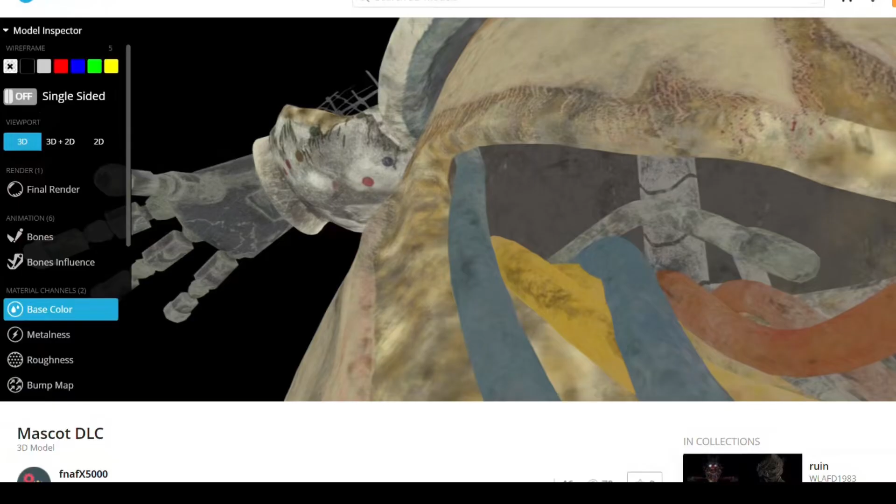You're going to find your model. I use this website, it's called Sketchfab, and it's really amazing for finding models. The model I've used for my suit is called Suit Springbonnie. It comes in multiple parts. So what you're gonna do is download it in the FBX format, and then you unzip the file.

If you need to make a human base that's custom to your features and your height, you can use MakeHuman. It's very easy to use. You can change a lot of parameters, but especially the height. Then you can go to Files, Export, and you can choose what format you want to export in. I go with STL because then I can import the same model into Fusion.

You're gonna go into Import and you're gonna find your human models. Alright, you rotate it, you make sure it's 90 degrees. You go to this tab right here and you verify the scaling is the way you want. Then you click on the model, you open that little transform window right here, and you verify it's the exact same size you want. Here it says it's 17 meters tall, so of course it's not. You're going to fix that. On each axis you're going to have to fix the height.

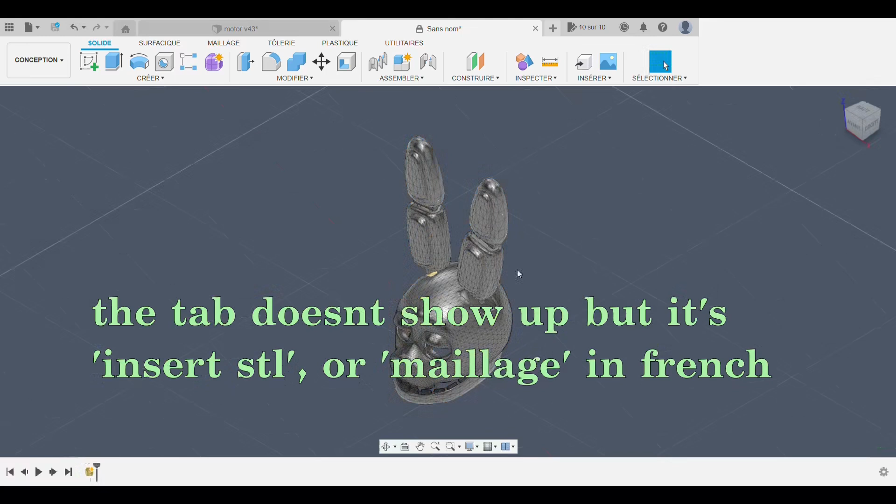So you need to hop on to Fusion 360, which is a free software, you open a new conception, you go to Insert, then you can select the STL file and hop, voila. Alright, seems good to me. So then, once that is done, you can go to Modify, and you select that. So basically, you're going to select each part individually, and then you're going to separate them from the main body.

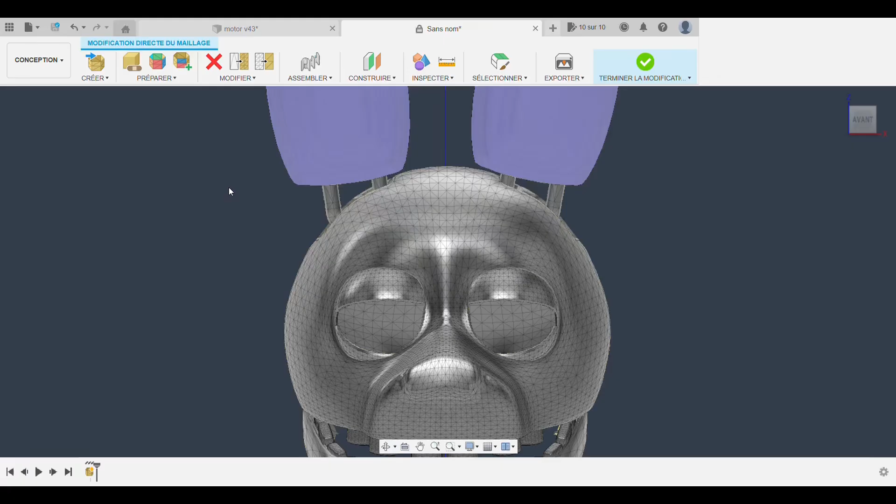This is a very easy process. You just have to double click on the different parts to select them entirely, you know. I'm also going to select the teeth for this one, then Modify and Separate. Hit enter. Do the exact same for all of them.

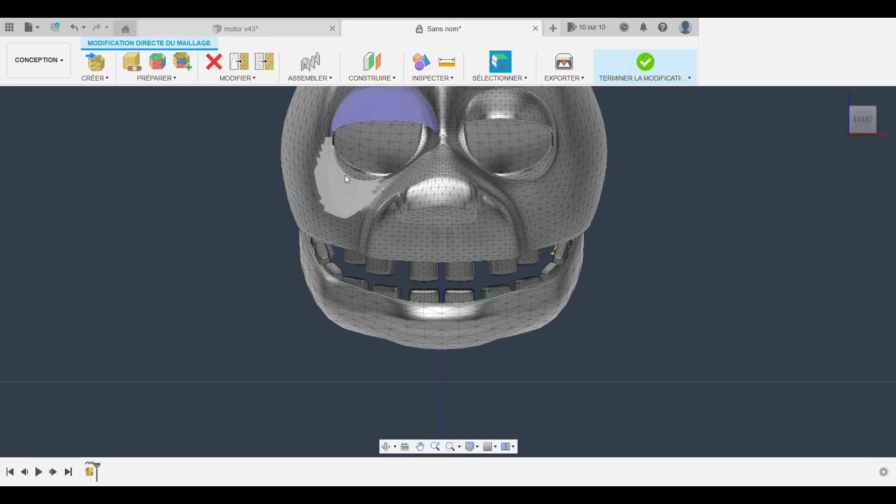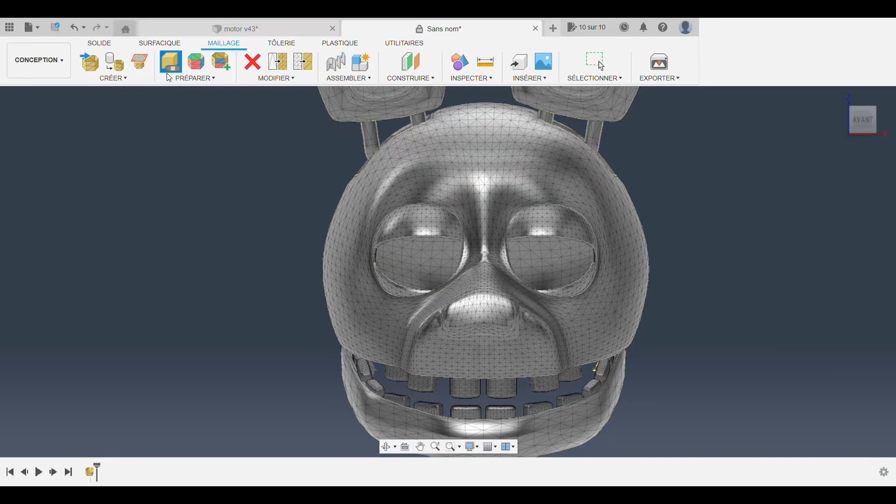So now you've got everything. You're going to turn this STL file into a mesh that you can modify one by one. But first off, I like to hit repair so that I can make sure everything is safe to be turned into a file that you can modify. Ooh, wait, right. So that's an issue you can encounter. I'm going to convert this. So you should have something like that.

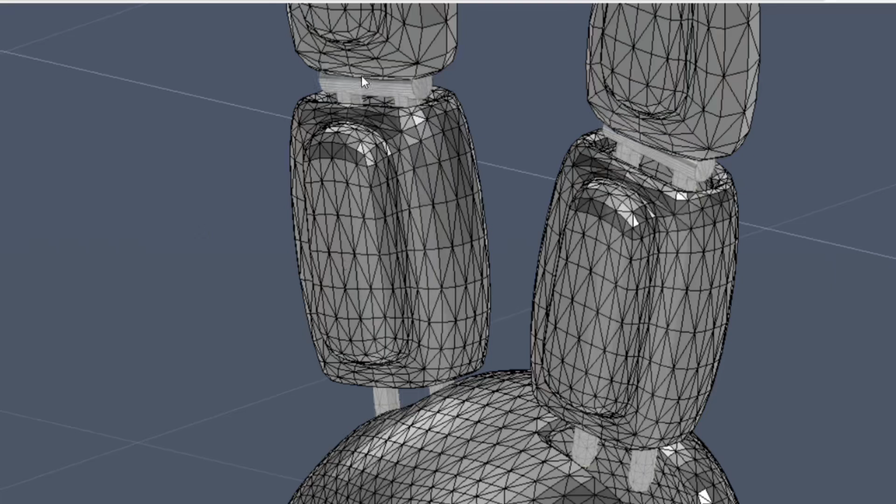So you've got your mask ready. Well, since I don't want these eyelids to move, what you can do is try to resize them so that you can try to wear them. But what I'm gonna do first is clean the mesh a little bit, since it's pretty rough on the edges.

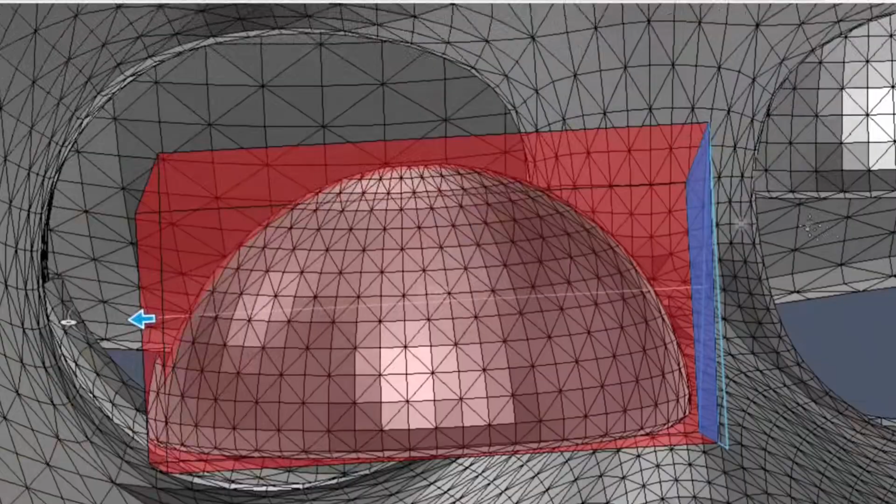Right, so what you're gonna do is hit L for line. You select the face. Basically, what you wanna do is draw a shape like that, right on what you want to remove on this eyelid. To clean it, you select the face, and then you extrude all the way here. You press cut. When you have this kind of double layer like this, it's when you don't repair your STL.

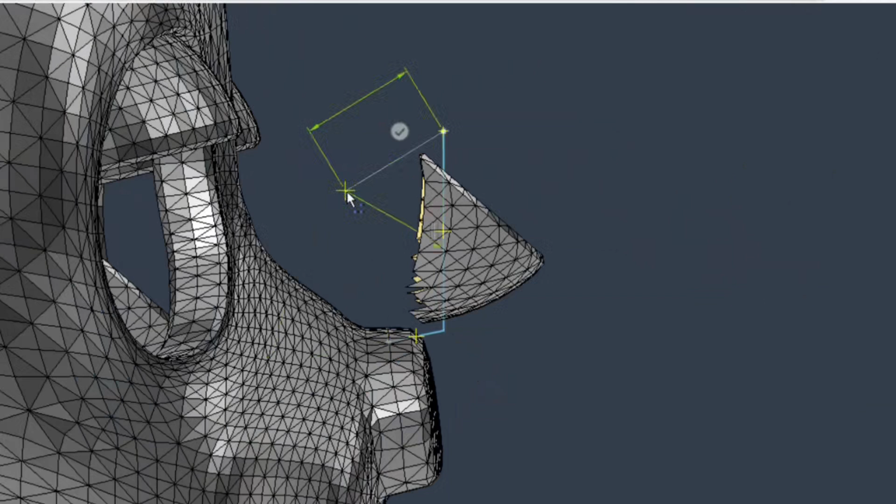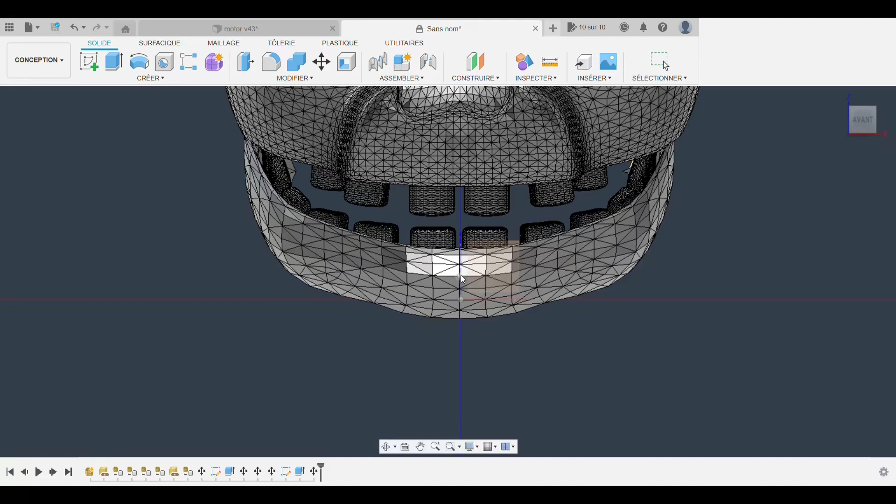So you don't need to do that for the other side. You can hide those two by pressing V. What you're gonna do first is go to this right here. You make a plane that goes through 3 different points. You select 3 points in the middle of the mask. You see, like that.

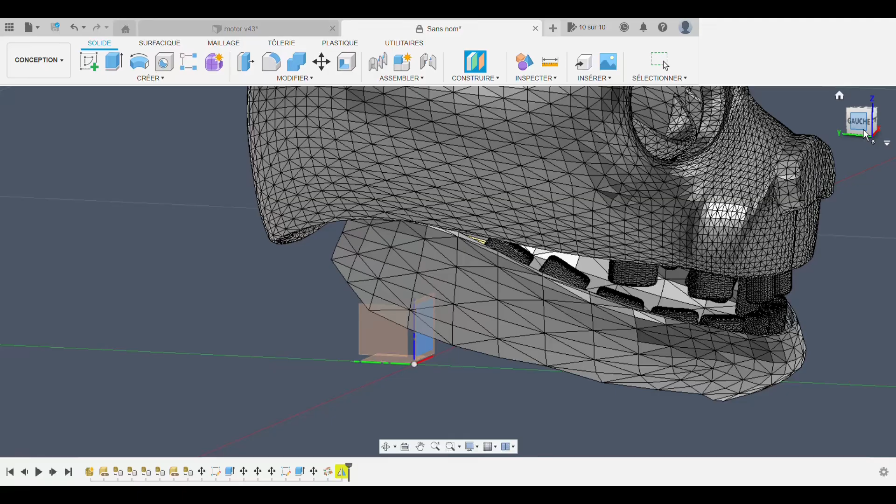And then you go to create, symmetry, you select the eyelid, and then under you select this. Alright, so you have that. You can hide this plane, we don't need it anymore. And you're going to use Fusion to slice the model.

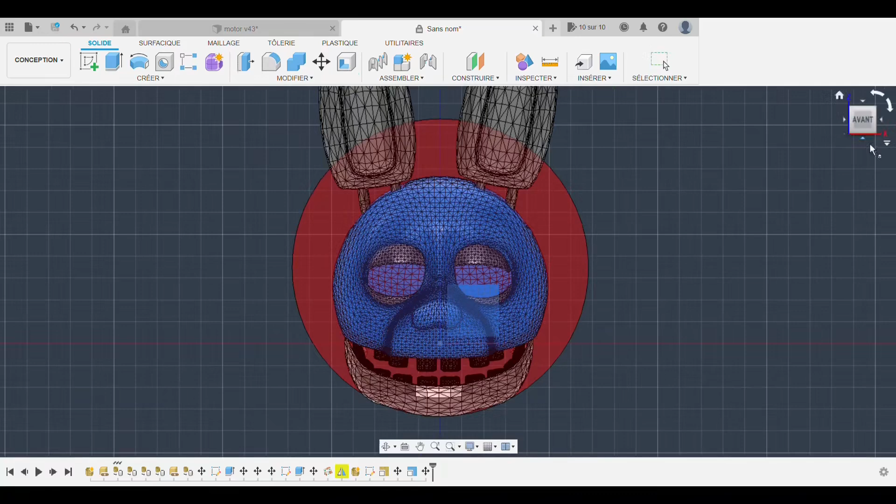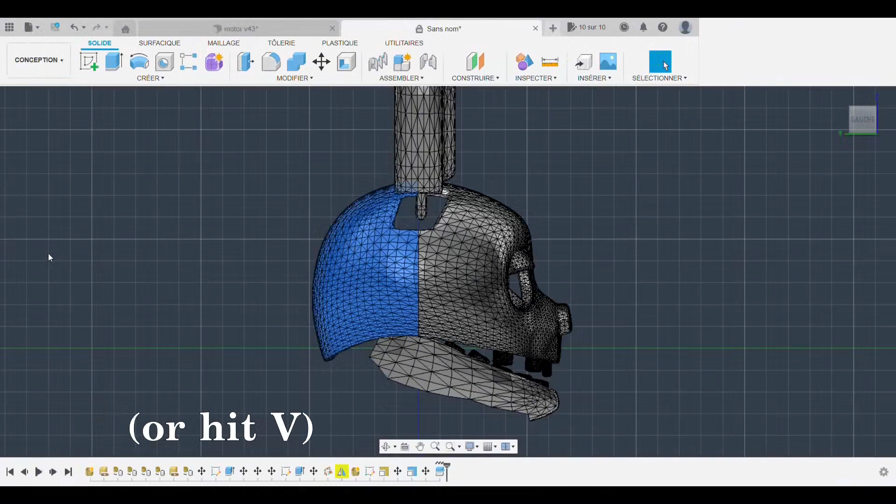You can go to modify, cut the body, and you can cut the head in 2 different parts. Depending on the size of your printer, you can cut the head in as many parts as you want. Back, etc. So I'm going to hide the face by clicking on the eye icon. Then I'm going to create a part like this. I'm going to press L.

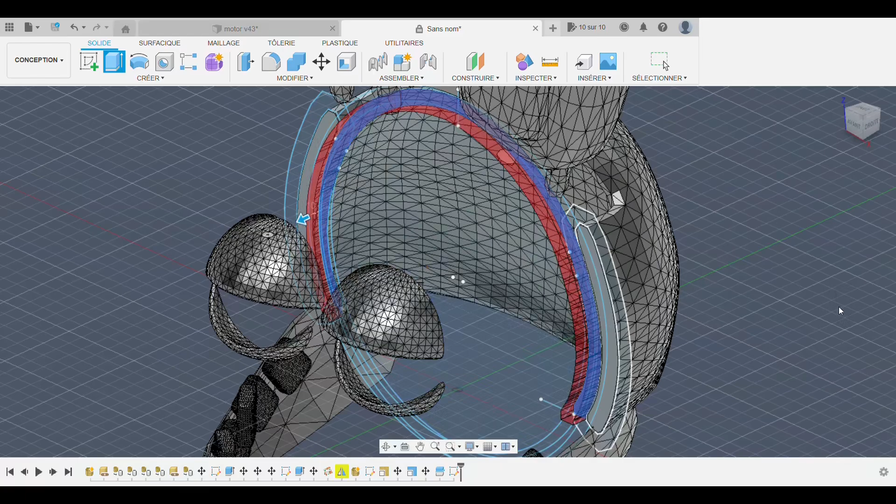And there you go, you've got some kind of arch. I'm gonna go for 2 sides, 10 as well, might as well do it. And there it is, you've got your support for the eyes. What you can do next is make some holes for the screw. What you also can do is just glue the face or solder it. It's really up to you.

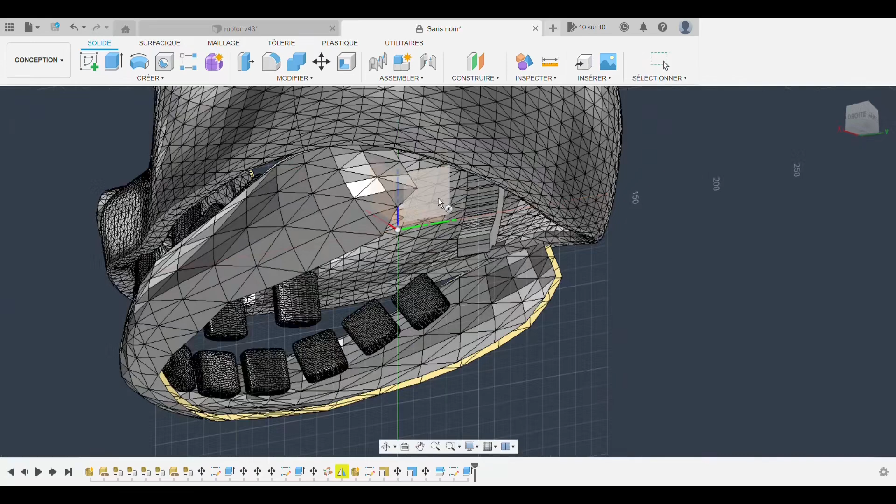I'm just going to add a few holes for the arch to work. So you just sketch some circles. I'm gonna go for 8mm. So now you have something to put your screws in, alright?

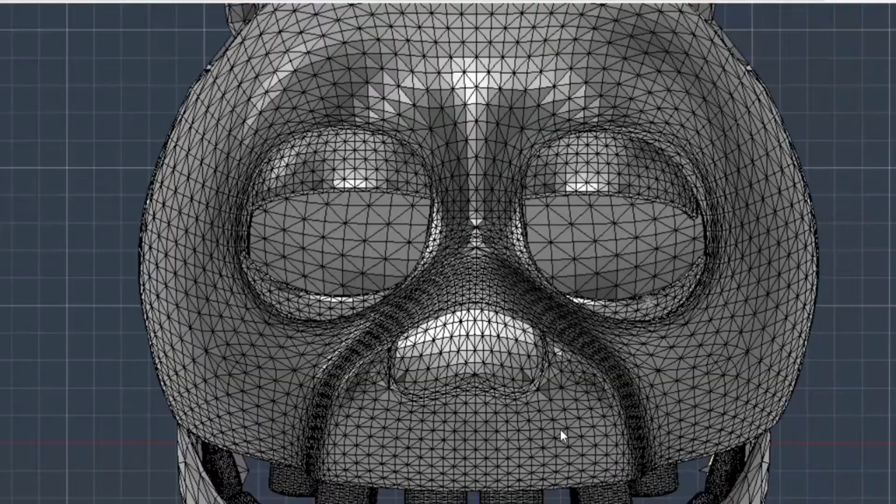And let's rearrange the endoskeleton so that we can put the ears. For this tutorial, the ears will be static. If you want the ears to have some articulations, I'm going to perhaps make a tutorial for that, but for now they are going to be entirely static.

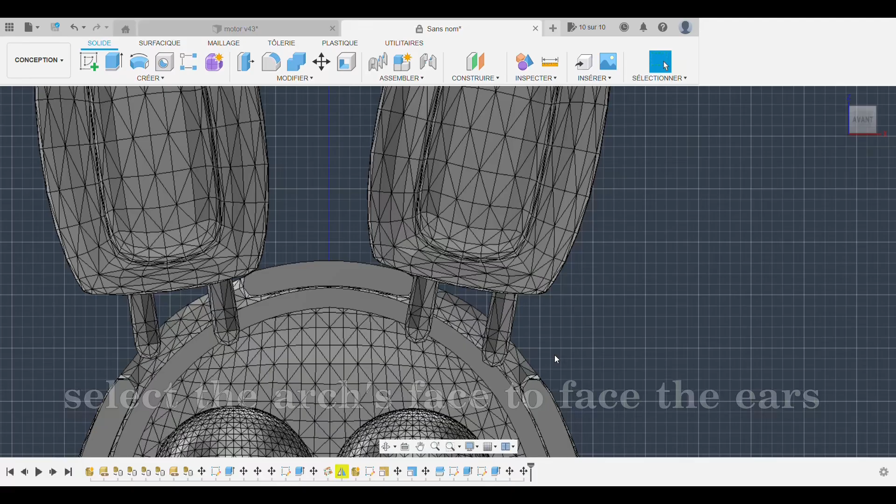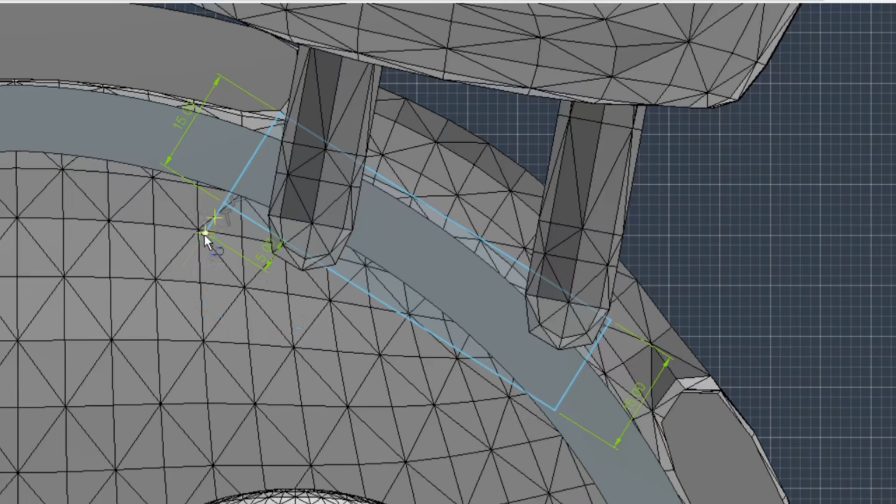Right, so I'm going to make a part that will kind of use these 2 rods to make a connection to the base part. Then you extrude, you hit new body, and then you can just put everything together. And then of course, oh wait, I forgot one of the different points here.

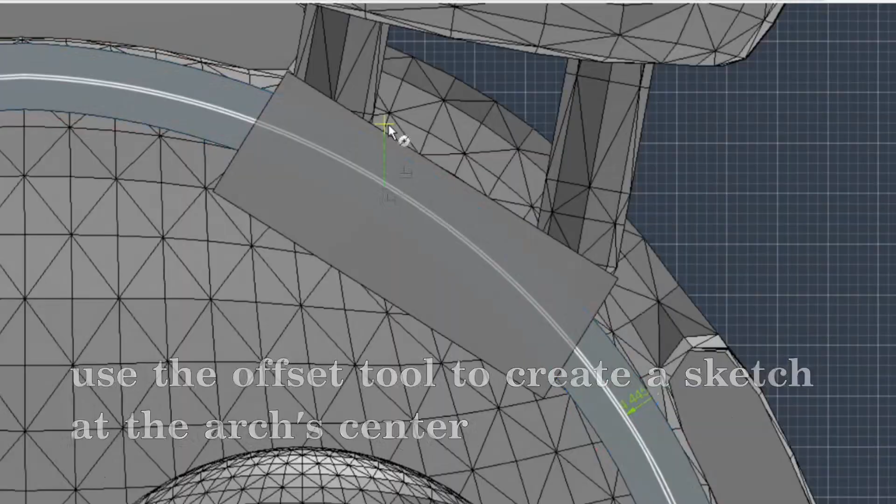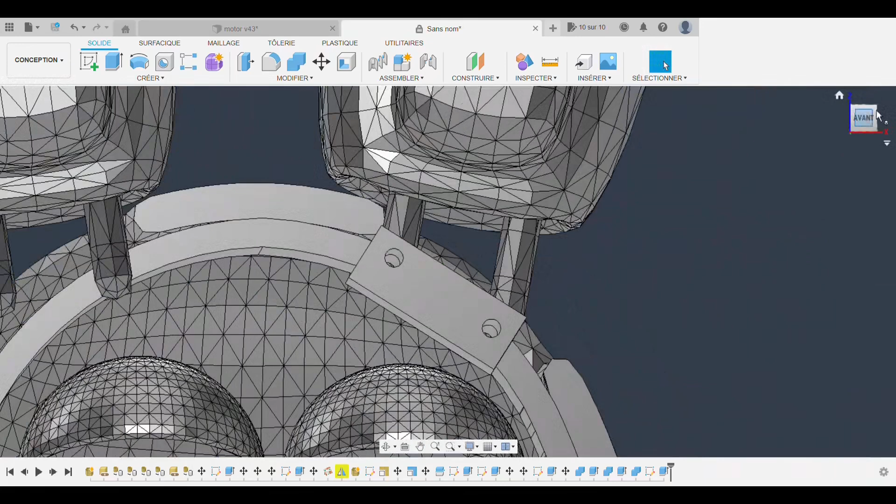Then you're going to hit C to create some holes for the screws to be in. So, using that middle part I can do 2 holes, 6mm each, and then I can extrude these holes. The ears like that will be static, of course. They won't be able to move, but that's for the better because it's a beginner tutorial and I don't want to overwhelm you, you know.

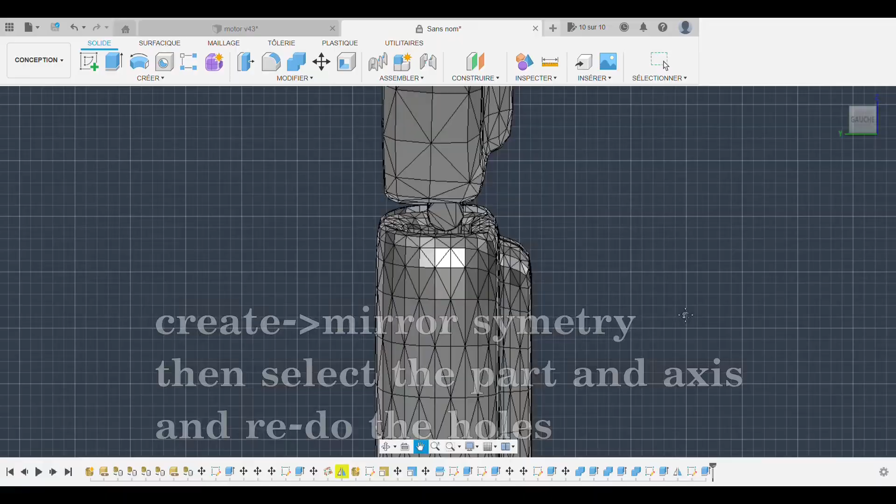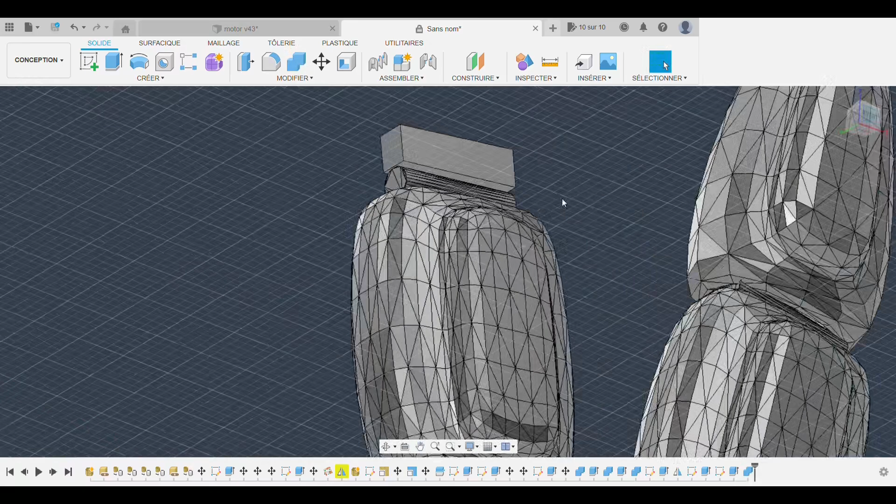You're now going to be able to create symmetry of this. The exact same mechanism for each part so that it doesn't move, with the 2 screws mechanism. You do 2 small holes. It really depends on the screws you have, but I'm always going for 6 or 2 millimeters. Yeah, you're gonna have to screw things.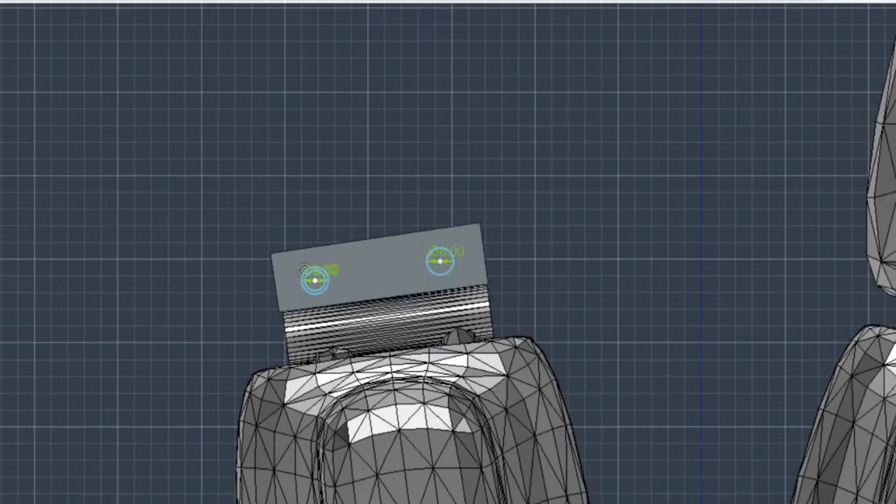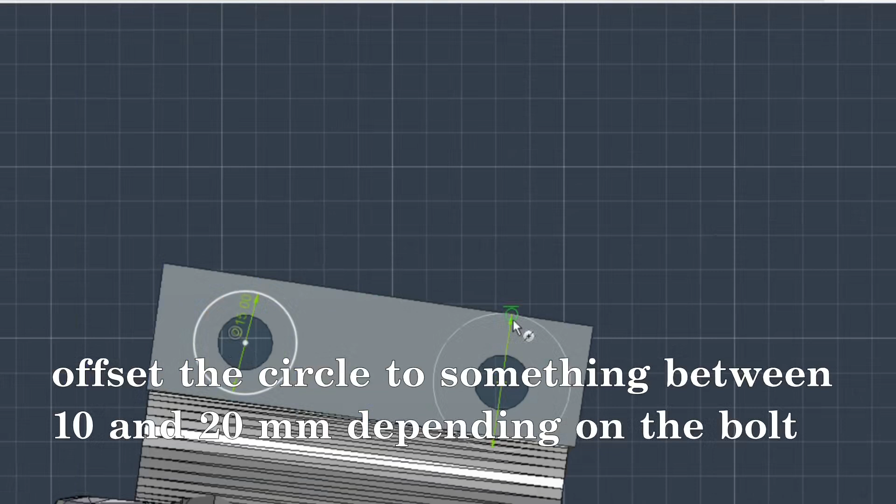So you're going to make some place for the head of the screw to go. I'm not entirely sure how wide the head of the screw is, you know, of the bolt. That's something you'll have to check on your side. I'm just showing approximately what this will look like. So you have the part where you can make the screws go.

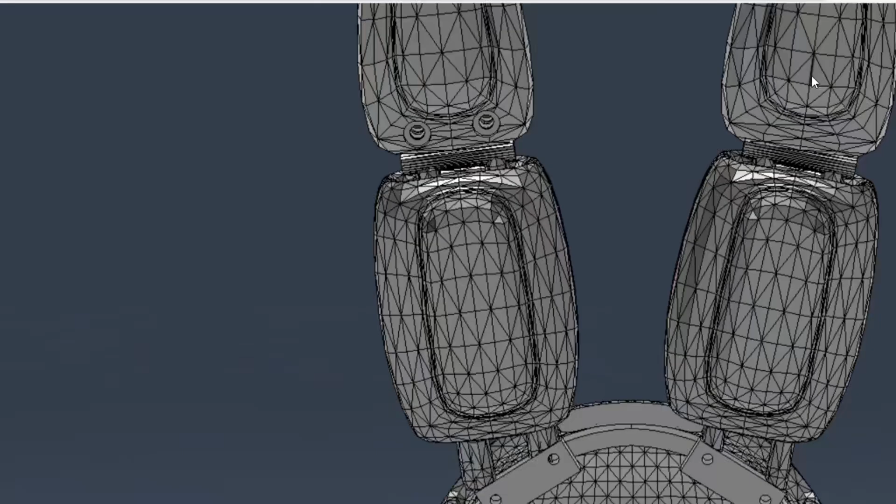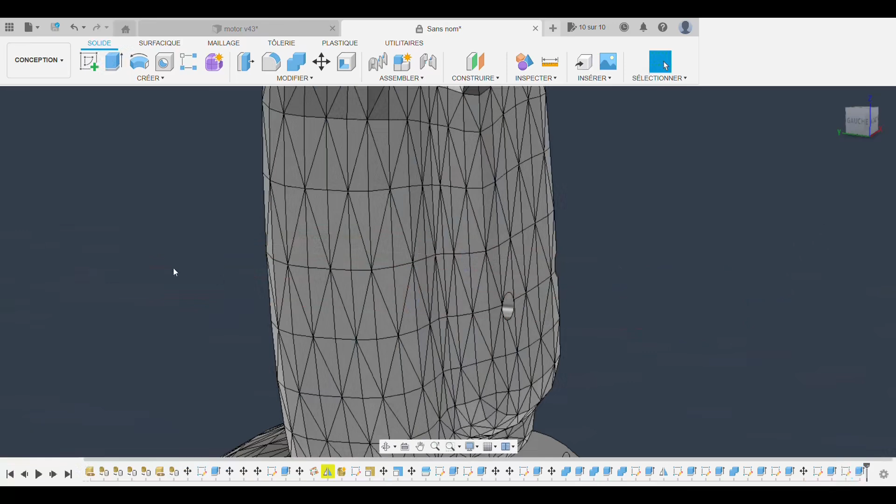When you assemble the whole mask, you can always drill some bigger holes or something like that. That's something that you can do, and just ask your parents if you're young to do these things for you.

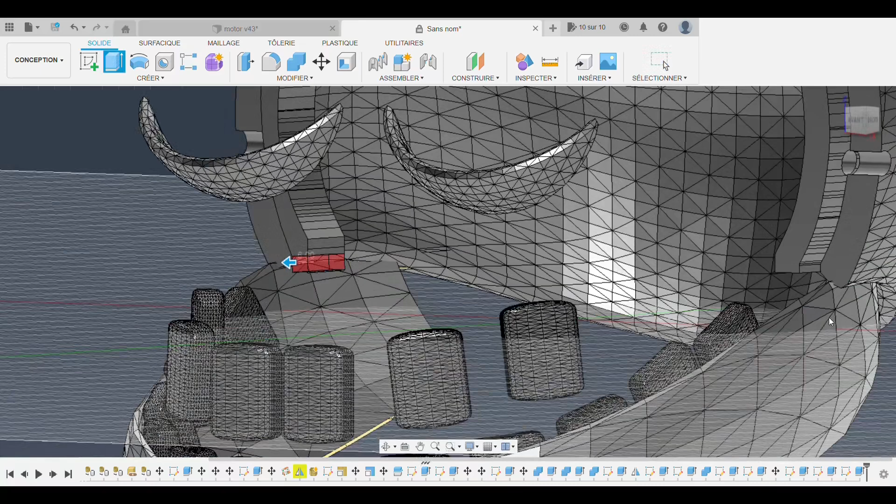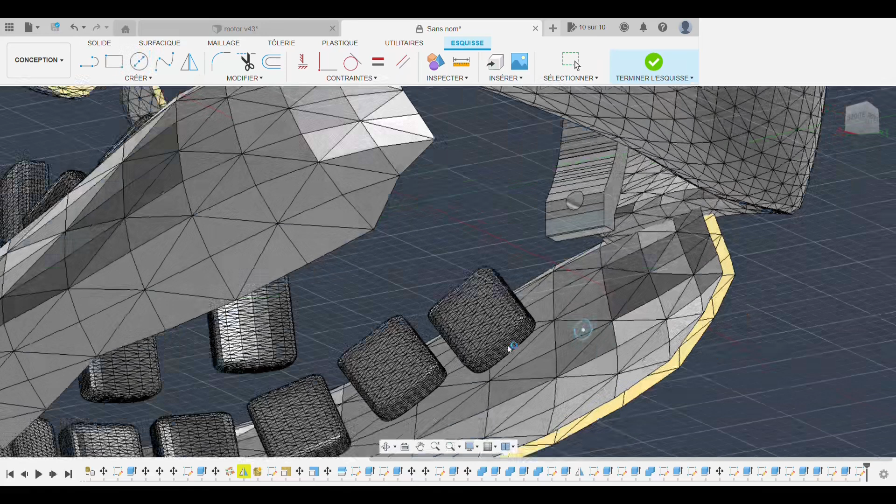What you can also do, of course, is the spring jaw mechanism. So actually I can do this mechanism using the arc like this. You go for 6 millimeters, and these holes are going to be for the screws that you're gonna use to screw the springs or fabric band, anything really that you can use to make the jaw move, to link the jaw, but something that's not too rigid, you know. Go like that, symmetric. Once again, you cut, and there you go.

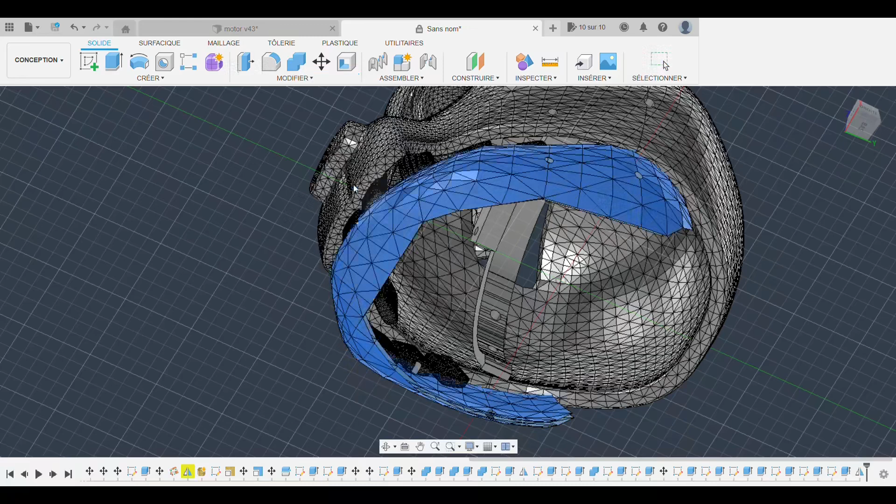You're going to go to modify, cut the body. You select the face you want, like the axis you want to cut it in, like that, rear right, here. There it is. This is your Springbonnie head, ready to be printed. So the ears are done and static. You can use screws to screw everything in place, not only the jaw but also the arch that's inside, like this. And you can wear it.

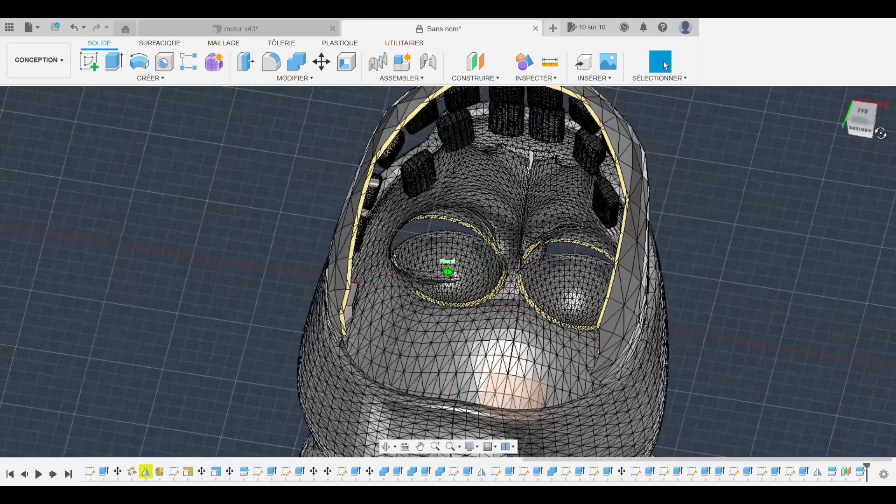And so there it is, voila! You've got your amazing Springbonnie cosplay ready.

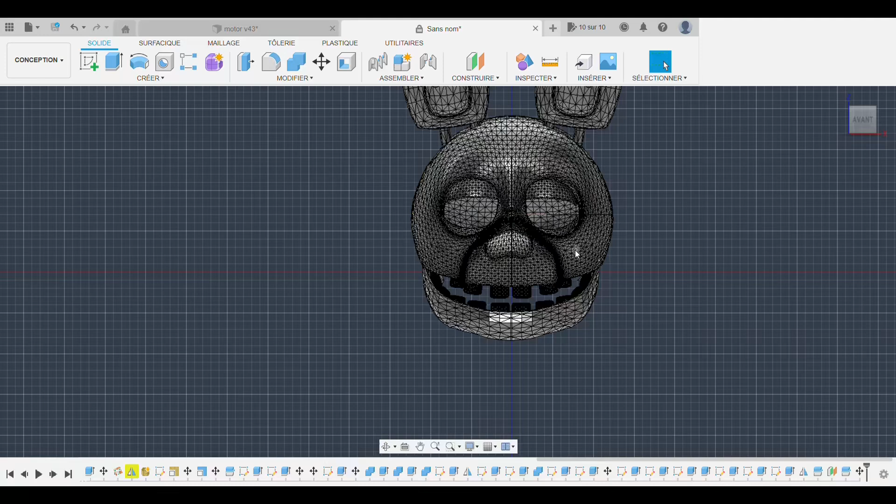Obviously this is a very short and basic tutorial with no articulations, nothing too special, but you can build from that tutorial, build your Fusion 360 experience and build your knowledge about mechanical parts to make something even better with articulations, with springs, and of course with servo motors. For example, you can make the eyelids work by themselves, and that would be good.